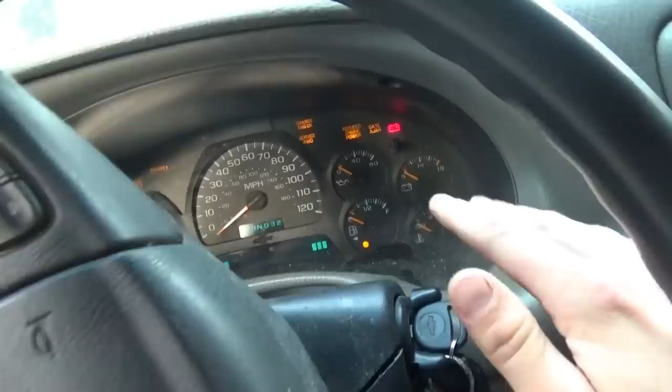Scanned it for codes, no codes. That's why I got the camera out. No codes, no crank. Where would you guys go next? On this system, I think it's a pretty standard starter relay controlled by the PCM. So let's go there and do our simple checks, maybe pull up a wiring diagram.

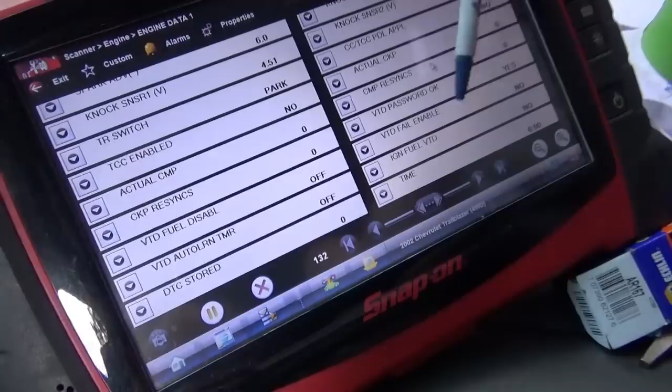By the way, we do have communication with the computer. All the data looks normal as far as I can tell right now. I'm wondering if there is a starter enabled. Fail enable, password okay, yes, everything's good, but the starter just plain does not engage. So again, let's go to the starter relay and do a couple checks there.

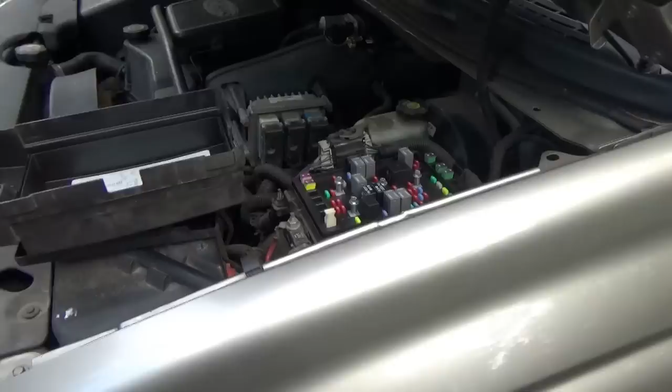Got our fuse box opened up. Mini relay 47 is starter. That's this guy. So we don't even need a wiring diagram, we already have one right here. There's a pin layout, 87, 30, 86, and 85.

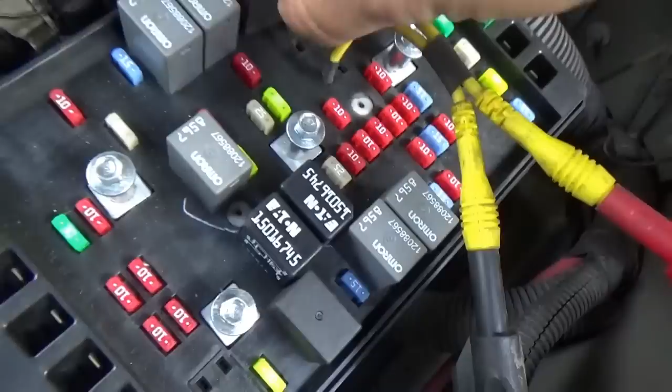Time for scope on a rope. Alright, we got the test light connected across the control side, which is pins 86 and 85. So if you flip the relay around, it's going to be like that. Those two guys. See what happens when we crank it over. Keep watching the test light and crank. Absolutely nothing. Kind of what I expected because the vehicle did die, so something's wrong with the computer control, I think. Let's check the load side, basically jump it and make sure the starter works.

Alright, now we're doing pins 30 and 87 through a fused jumper wire. Let's try it. Sweet, starter works. Control side issue. Now in this case we do need a wiring diagram because I want to know if it's power side switched, if there should be a constant ground, and we'll see what we're missing.

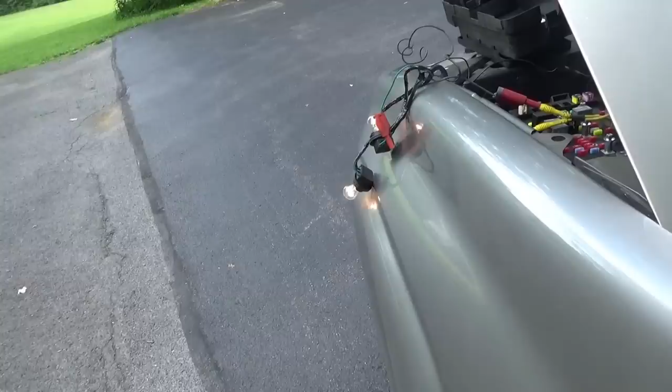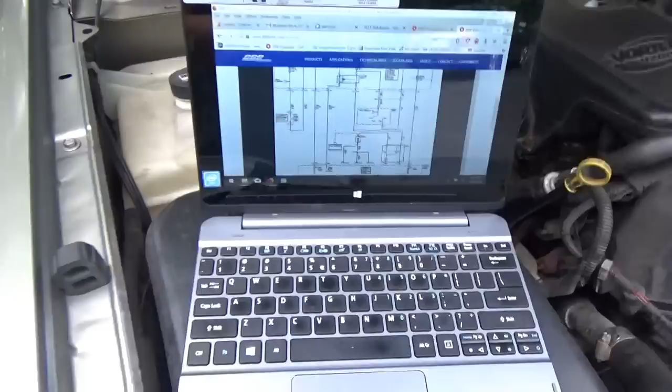Now what I want to do is jump from here, from battery positive, to the other control side. So it must be ground side switched since the other one gave us the power when the key was on, right? Let's try it. Nothing. Alright, so if it is ground side switched, we have no control on the starter relay. In this case, we do need to find a wiring diagram to be 100% certain of the way the circuit's laid out.

Alright, we got a wiring diagram pulled up for the starting circuit. There is our starter relay, and indeed it is fed in the run start position through the park neutral safety switch, so we did have that power, and it's controlled by the PCM on the ground side, and we're missing that. So what does it take to make the PCM ground that wire?

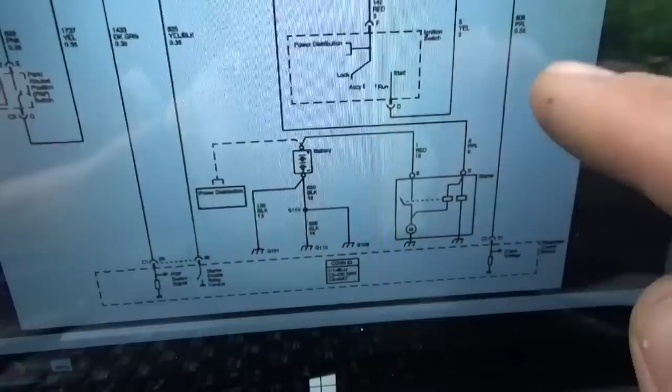Well, from the ignition switch, when you turn it to start, it should send voltage through this crank fuse, fuse 17, right to the PCM. So I think this crank fuse is key. We should check that we have power on that when we're cranking the engine. Simple enough. Alright, fuse 17 right there. It is our crank fuse, and it lives right by the starter relay, this guy right here.

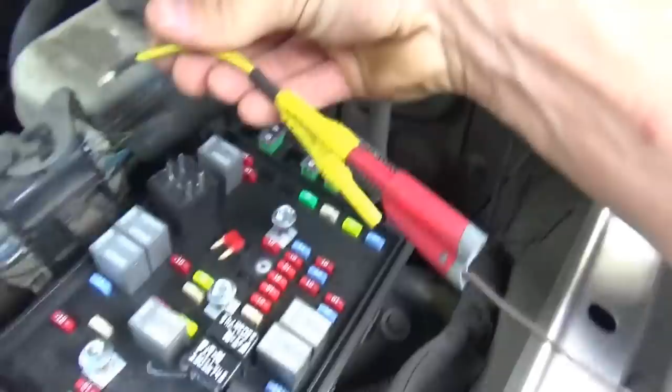So let's pull that out and hook up our test light, and we should have positive voltage on one of these pins. So let's try both of them. That's one. Strike one. And second pin. Strike two. Sweet. I like it.

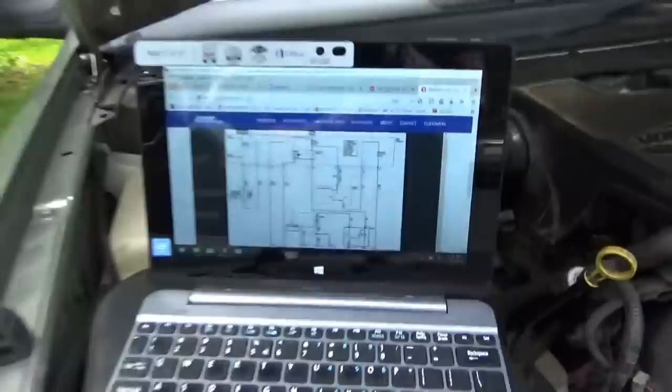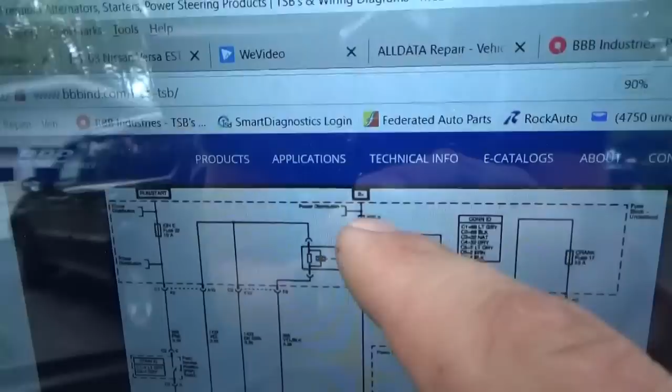So now, if we don't have power on the crank fuse from the ignition switch, where does it come from? Battery positive, ignition A, fuse 34, 40 amp in the same distribution box. Let's go there. And by the way, we know that fuse is good because we jumped the load side of the relay and the starter worked. So where do we go? I think we're gonna go towards this ignition switch.

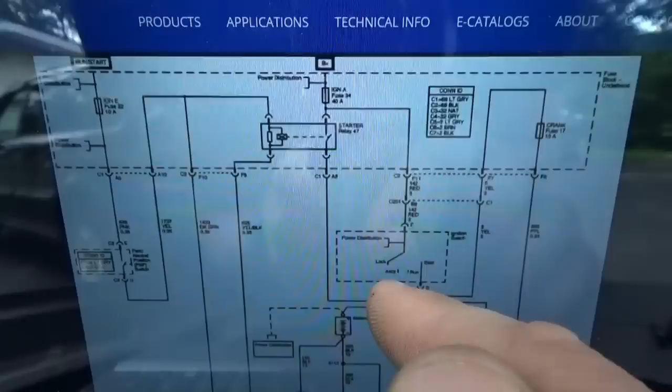So at the ignition switch, we'll pop the cover off, and we should make sure we have power at this red wire. And I would think that would be good there because it works on lock, accessory, and run, but not start. But let's go to this ignition switch, make sure that red wire's hot, and see what's going on with this start circuit.

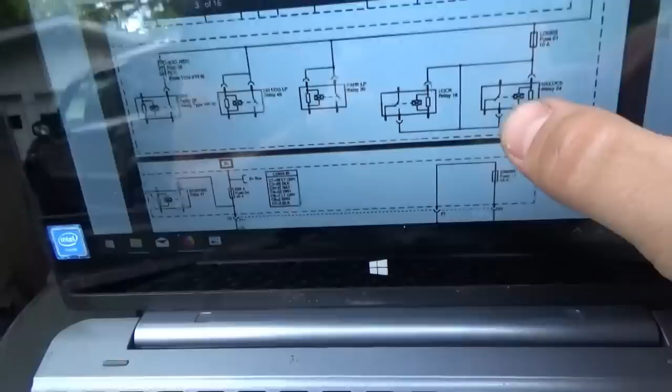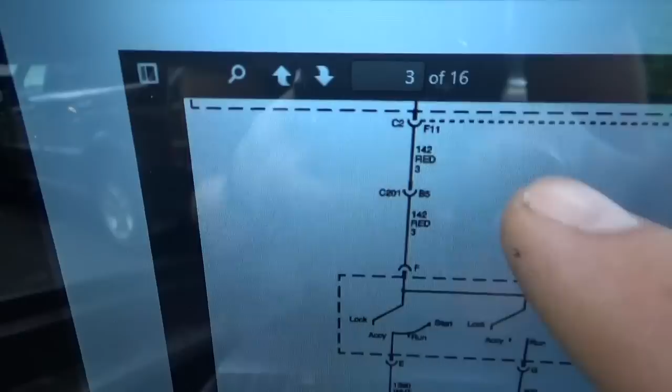Alrighty, so power distribution diagram. We want to see what all comes off of this ignition switch, what feeds it, and where the power goes. Now, let's focus on the start circuit. So the crank fuse is right there, and that's fed on this yellow wire, pin D on the ignition switch. We don't have that at the fuse, so we'll check that. And then it looks like everything here is fed off of the ignition A fuse 34, 40 ampere.

And most of the other stuff in the run accessory position seems to be active. And we have power to our PCM, we have data. So we're mostly worried about the start circuit. And then, keep going here, start and run. This is pin C, pink wire. So that might be a clue there. That feeds basically also a lot of stuff on the PCM.

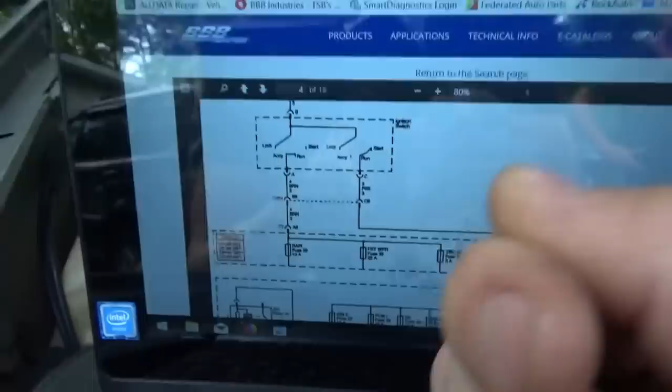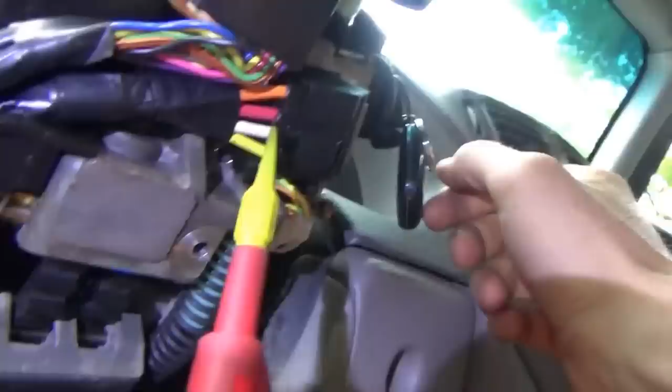Okay. And remember, when we turn to start, the whole dash goes blank, everything goes blank, and we have no starter action. So this pink wire we want to monitor in all key positions, and also this yellow wire on pin D. So let's get to this ignition switch and do some checks. Got the steering column off. Our test light works. This is the red wire. So let's see on the yellow wire if we get a crank signal. 1, 2, 3, nothing there.

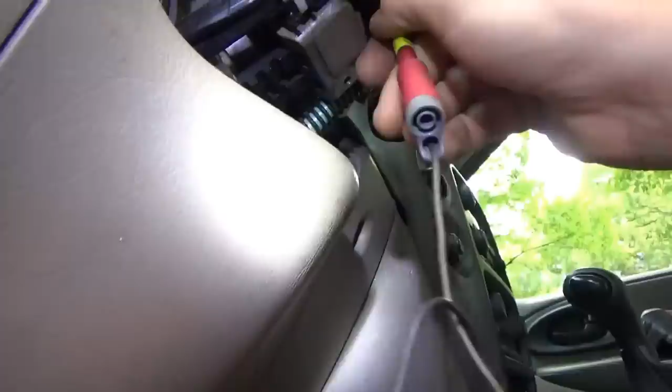That's a problem. And then, what other wires do we have here? We have a red up top. Try to back probe this guy up here. Okay, there you go. Stay in. See what happens to the feed. It stays constant. And finally our pink wire. That's hot right now. That's hot in run. Hot in crank. Interesting. Anything that we're missing here?

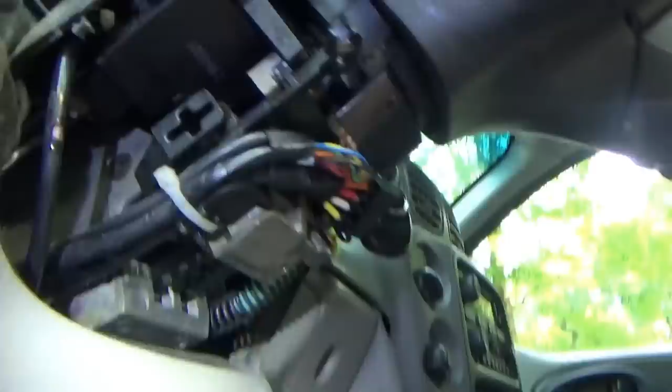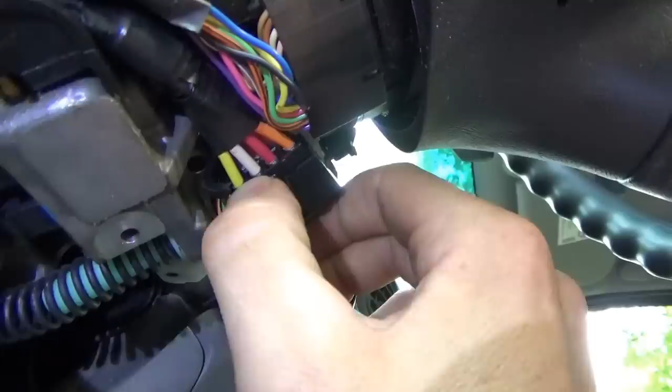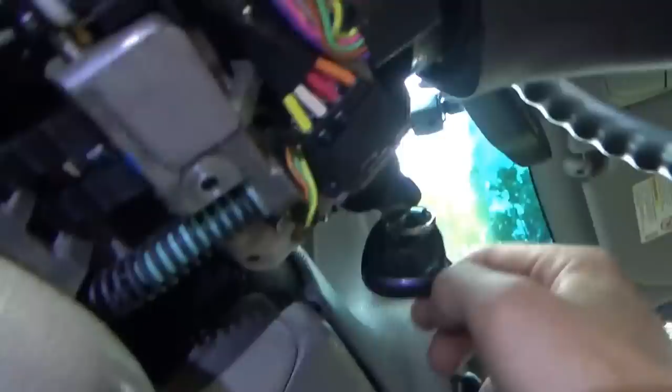So I just want to make sure what we're looking at. So red wire on pin F, and then the yellow wire's on pin D. A, B, C, D, E, F. I assume it's A, B, C, D, and then the pink wire should be E. Let's double check that. Oh, pink wire is, it says C. A, B, C, D, E, F. Okay, so it starts from the top. The pink wire is C, yellow wire is D, red wire is F. I like it.

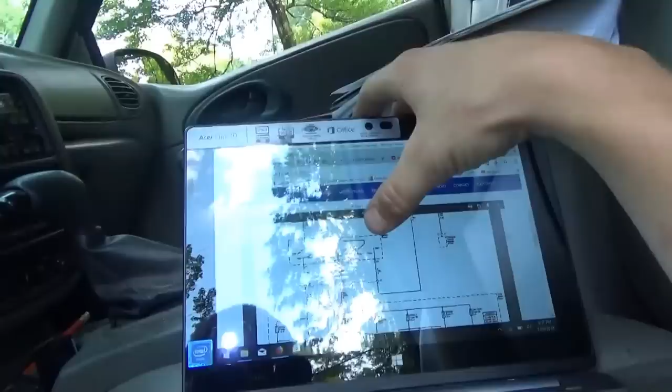So what's our problem? We don't have anything on that guy. So what we're gonna do is kind of be the ignition switch, turn it to on, and then simply connect pin F to pin D through a fused jumper wire, and that would be this red wire to that yellow wire. So let's try that. Let's pop the starter relay back in and pop our crank fuse back in. Should be good. I mean, you already replaced that. And let's get a fused jumper wire.

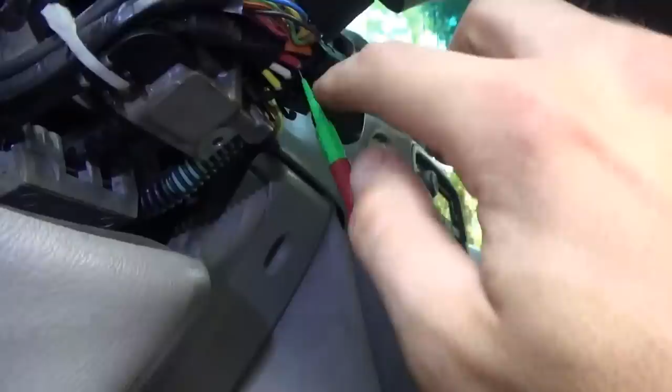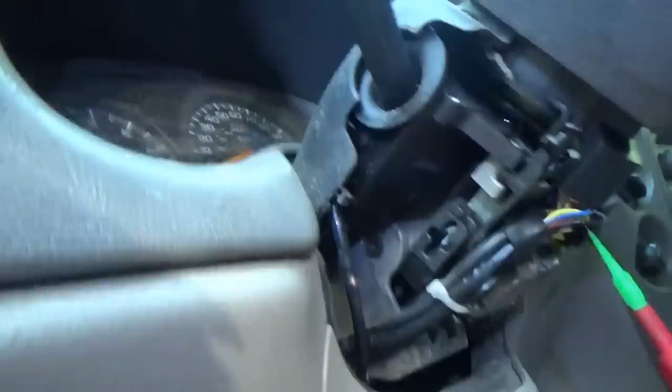Alright, so key's on, dash is lit up. Now we're connecting pin F to pin D, the red wire, pin F to pin D on the start circuit. Here goes nothing. Alrighty, nothing happened. Let's try again. Nothing. Well, that didn't go as planned. What did we forget to do here? Crank fuse is in, relay's in. What are we missing here?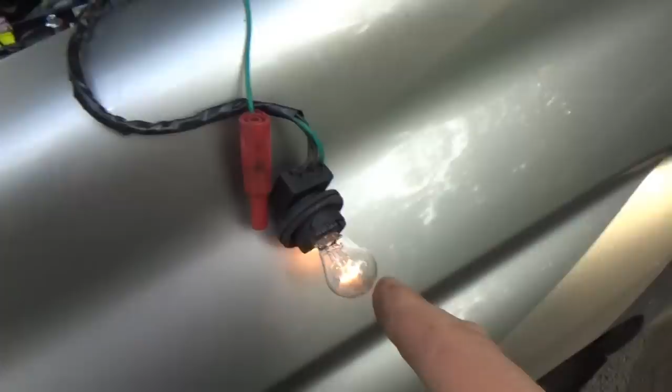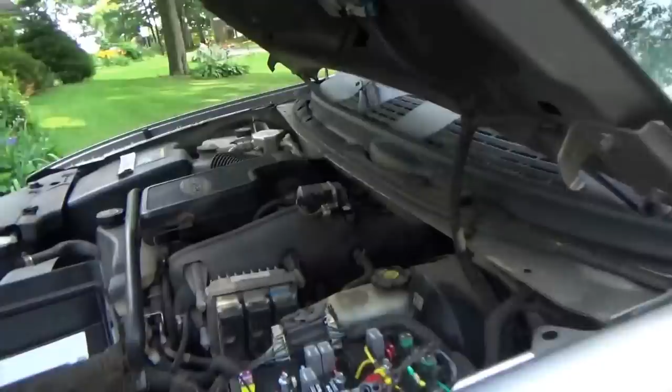Let's put in a test light again. In here, I just want to make sure we're getting signal from the ignition switch to here. Aha, victory. So, see the light is lit when we're jumping red to yellow. Disconnect that guy. No more light. So our yellow wire is good from there to the crank fuse. Cool? Cool. Now we know that that is the feed pin, so that must go through the relay to the PCM.

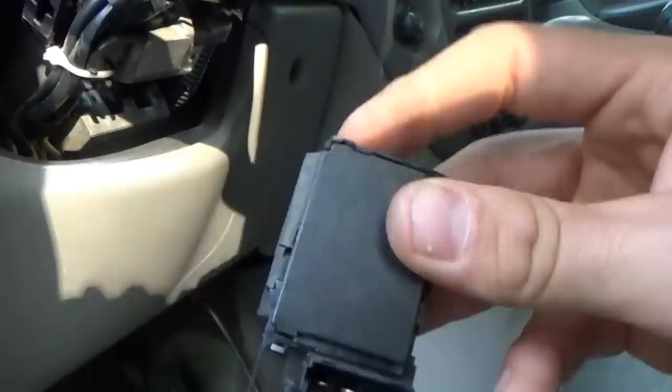So basically, when you turn the ignition switch, two things have to happen. We're feeding the starter on the start circuit through the crank fuse. So right now, the first thing we know is bad is the ignition switch. 100% guaranteed we're not getting a power feed on that yellow wire in the crank position. So basically, this contact right here, no good. New, this is the original one. Now, second problem, the PCM is not grounding that wire when we crank the vehicle. Problem number 2, right?

Why would that be? So this kind of sucks because we could have been done. It is a bad ignition switch, but there's also another problem. Why did the vehicle stop running? All the other wires that need to be hot in crank and run are there. So basically, what we can try to do is turn the key to on, manually jump the starter, see if it runs, and that'll at least tell us that the computer is operational. Then we'll figure out why the control side's messed up.

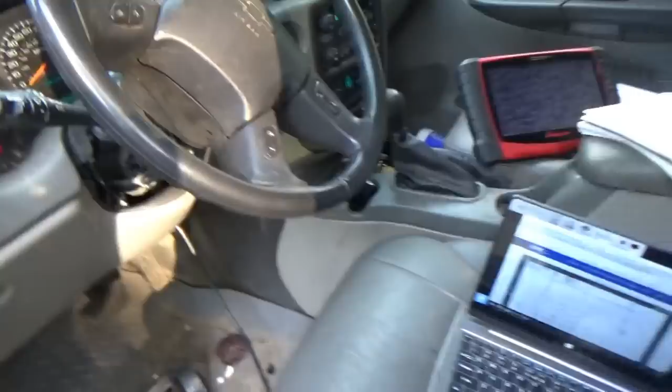Here we go. Key is on, ready to go. Manual bypass test on the starter. Connect these two guys through a fuse jumper. Does not run. Also expected because the thing stalled out for no reason. So now we're going towards the PCM, powers and grounds. Right? This PCM has no control of the starter relay, even though it communicates and gives you data and stuff. So pretty interesting, huh?

Alright, so we're not going to mess around with this stupid thing. I took it out, the new one, put the old one back in. We're back on the yellow wire. Here's what should happen in the crank position. Ready? Boom. Nice. Right? On, crank, nothing. But the light lights up, so this switch is good. Put this fuse back in. Put this relay back in. Obviously it's not going to start. The PCM is not grounding it, but at least we have a good feed to it now. Right? Good.

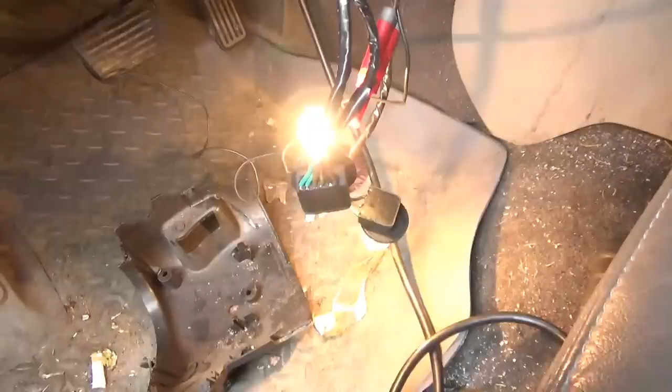Now, here's my question. How does the PCM know when to ground the starter relay? Is that like, you turn it to on, it says starter enabled, it grounds the pin, and then when you turn it to crank, you provide the power, circuit completes, starter engages. So that pin should be grounded whenever the computer is happy to go ahead and start this truck.

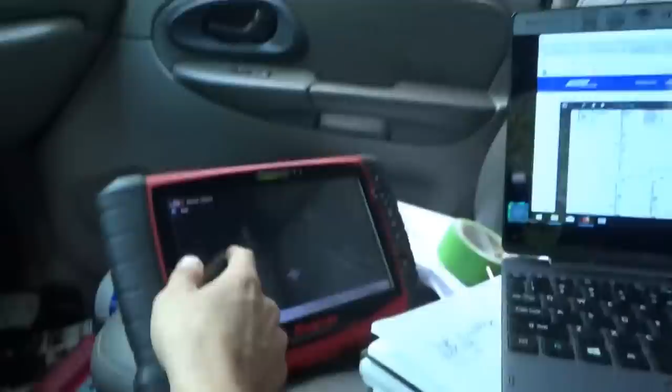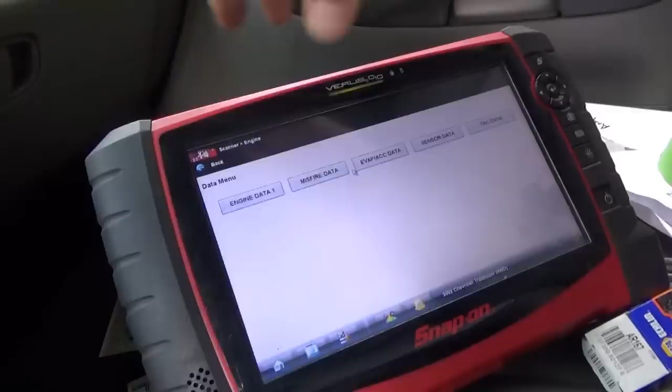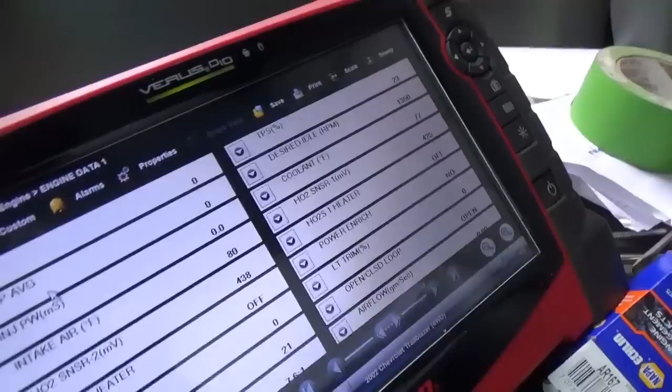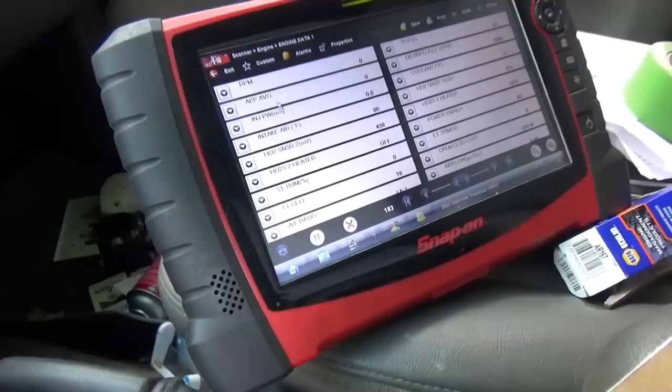So let's go back to our scanner for a little bit and go to data, and see what happens when we turn it to crank. Our data is still updating. Turn it to off, or run, still good. Turn it to accessory, and now it's not updating. Actually, it still is. Take the key out. So the PCM is still alive. Might be a GM thing.

So, just a second. Where's my pen? All right.

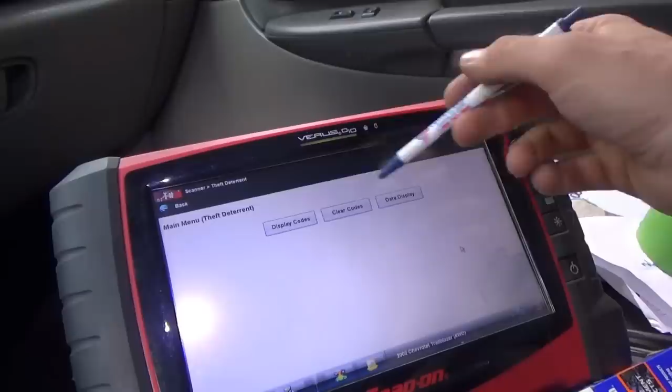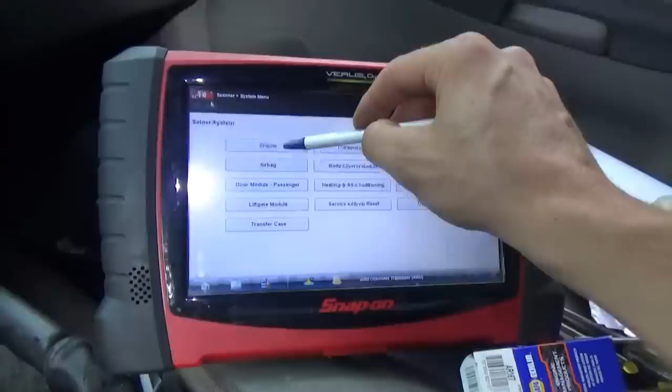Turn the key on. We see a security light, and it goes out. Good deal, right? In the theft deterrent menu, I can't for the life of me communicate with this thing, so I'm not sure if it has a separate module for this or if it's controlled through the BCM or not. According to the wiring diagram, well, anything could be tied into the PCM. So if the PCM is not grounding it and not letting the car run, that could be a problem. But you would at least expect some kind of code in the PCM, right? And right now we have no codes present. So that's that.

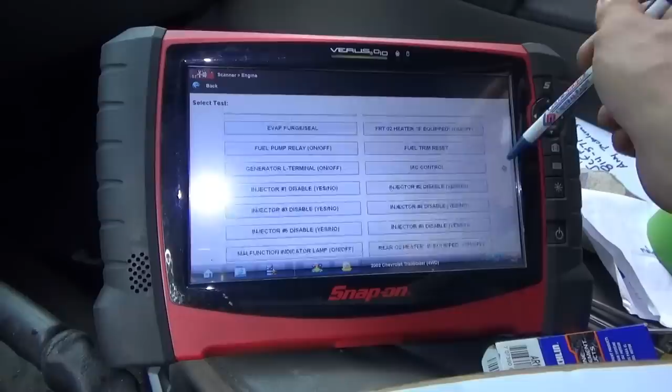Where do we want to go here? Functional test. Let's see if we can just command some stuff on and off. Vent solenoid, purge solenoid, air pump. Nope. I want to hear something click. Fuel pump relay. Here we go. On. Off. On. Off. Nothing. Very interesting.

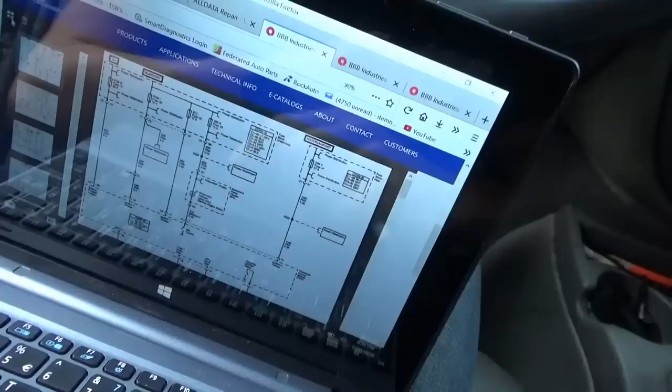Okay. So, what does it take to make this computer activate stuff? Do we have a power or ground issue on this computer? Even though it's talking, it has more than one power and ground, right? So my thought is go back to our engine control diagram and just look at these powers and grounds. Let's zoom in on this guy a little bit. Oh, come on, stop it.

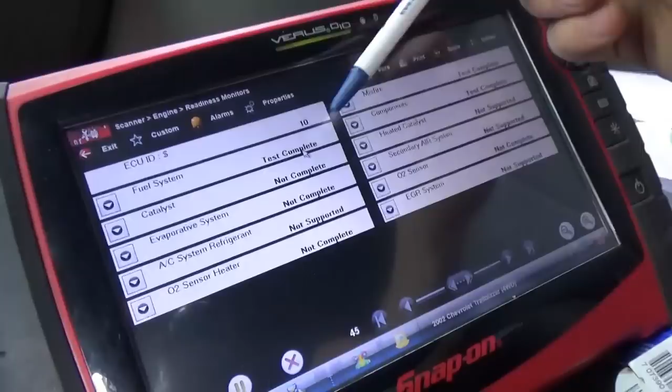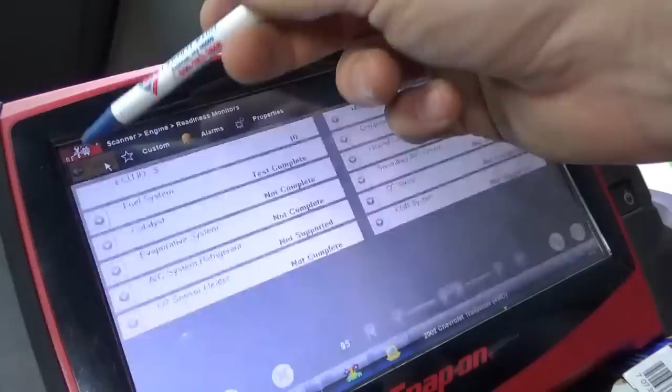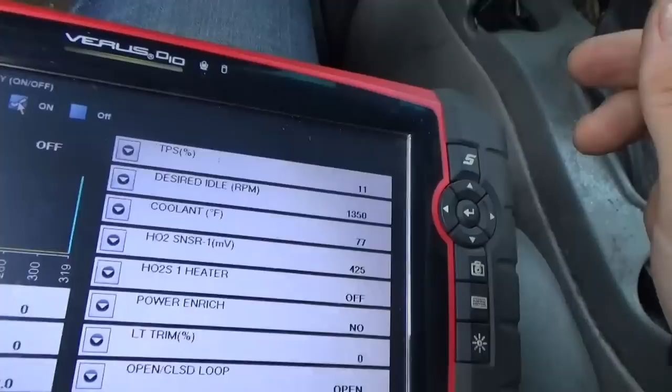Just for kicks, I went into OBD2 to see which tests in the emission system were complete. Obviously, this truck has been messed with already, but we do have some complete tests, so the computer seems to be alive. Now here's something else weird. I can't do a bidirectional test on the fuel pump relay. It just says off. I don't hear it run. Got nothing. If you press the gas pedal, throttle position sensor seems to respond just fine. Man, this is not as straightforward as I thought it would be.

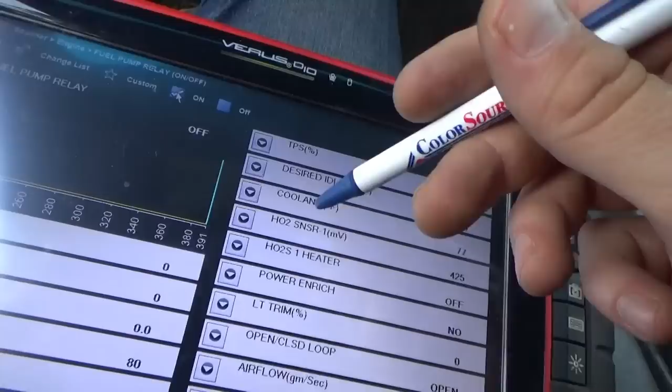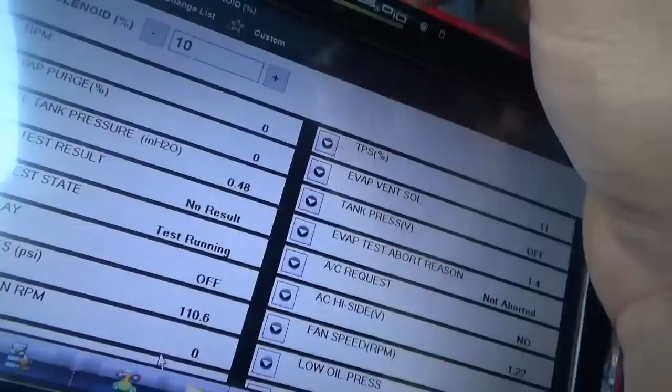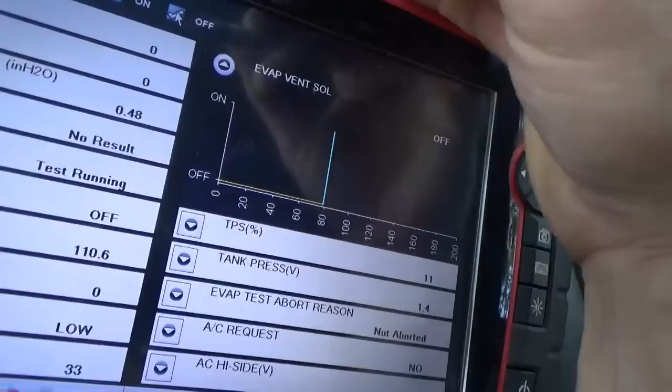Why do we have no bidirectional controls of anything? Let's try purge solenoid. How about that? I want to see if anything on this computer works. Test. Purge percent. That doesn't work. Vent solenoid. Where's the vent solenoid? There you go, vent solenoid on or off? On, off. No clicky. No bidirectional control. What the heck? Oh.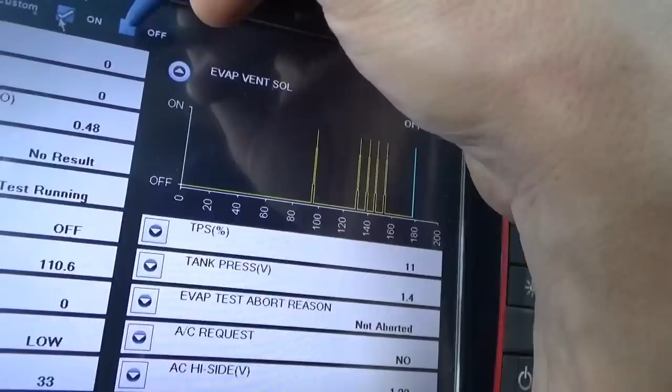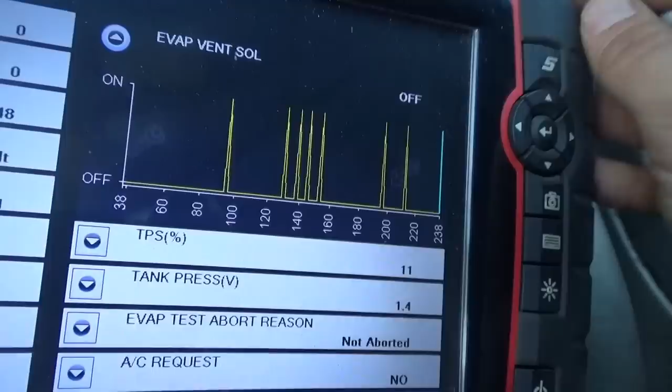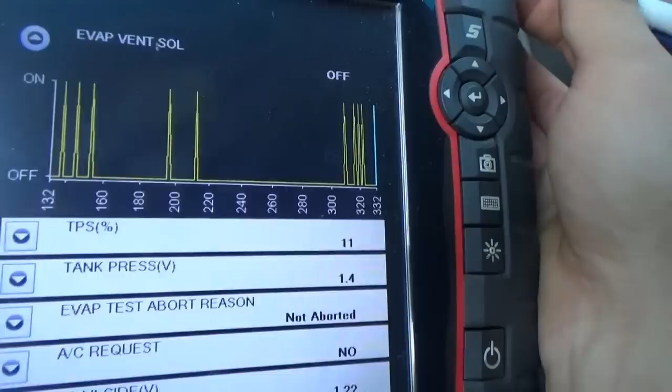Okay, I hear it clicking. So it did 4 clicks, I guess. Off, on. What kind of bidirectional control is this? Off, on. Come on. Click. This is crazy. It did click. It didn't click there.

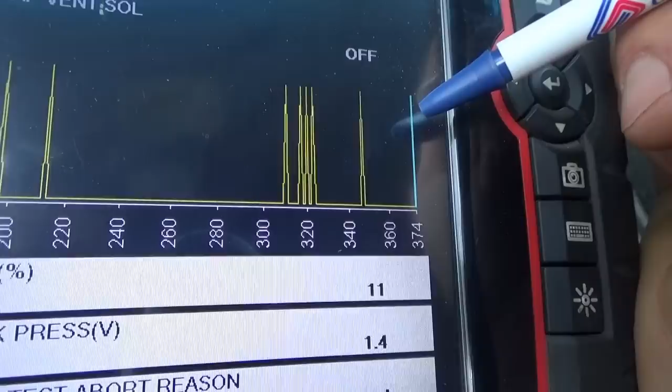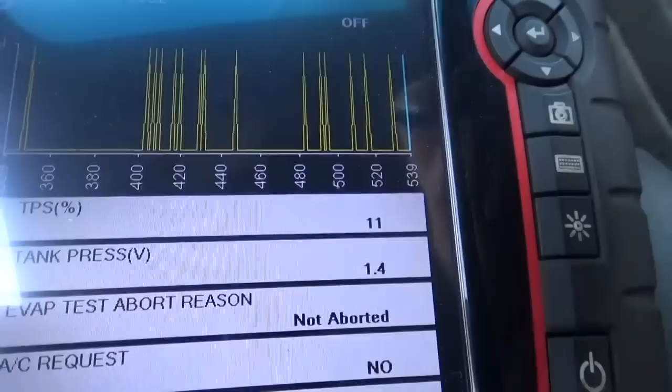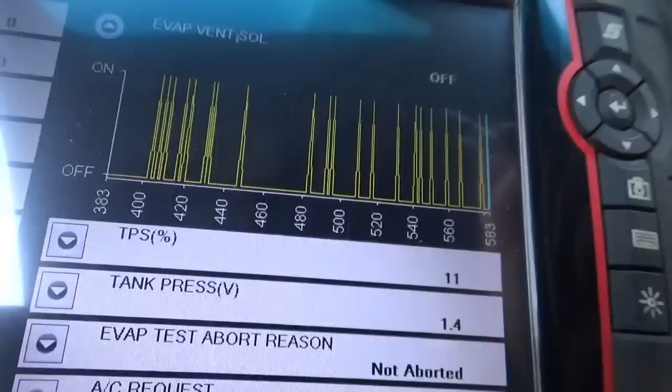Something is messed up with the computer, isn't it? Is it trying? It clicked those 2 times, not those 3 times. Isn't it supposed to be just on or off? This is nuts. Are we dealing with a bad ground? Why the heck would the vent solenoid do this? Yeah, I've never seen a bidirectional control do something random like this. And it knows when it's on or off. Off. You would think it would throw some kind of code for this. I mean, that's not normal.

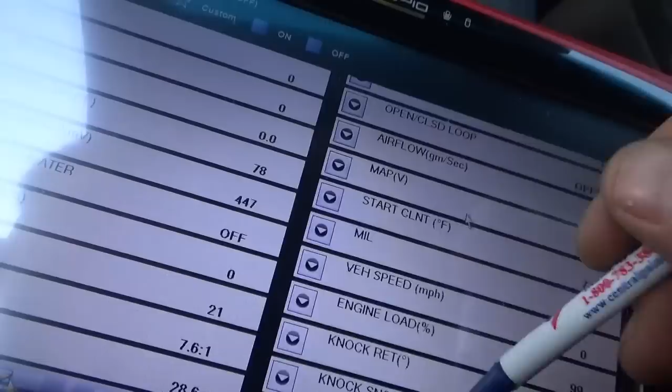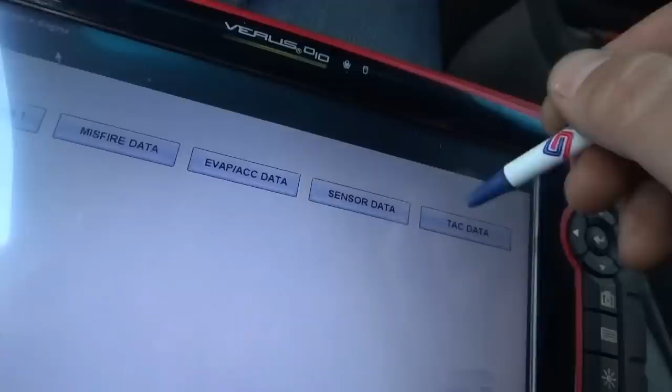Let me see, AC relay. Can't turn the fuel pump relay on. Let's see. Where's our AC relay PID? I guess we could change our list to evap accessory data. AC relay on or off. Let's see, on. Cannot be commanded on with engine running or dash control off. Interesting. Okay. But the fuel pump, it has to be able to command that on.

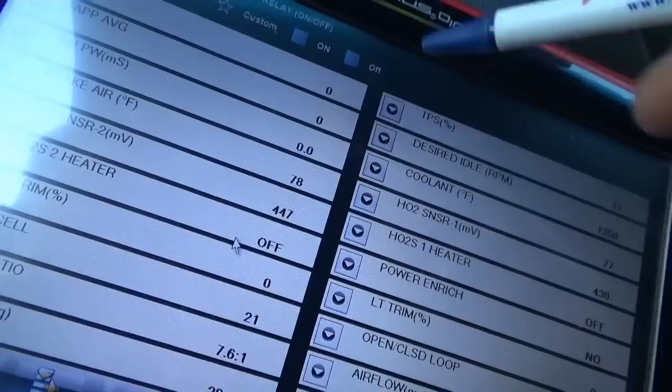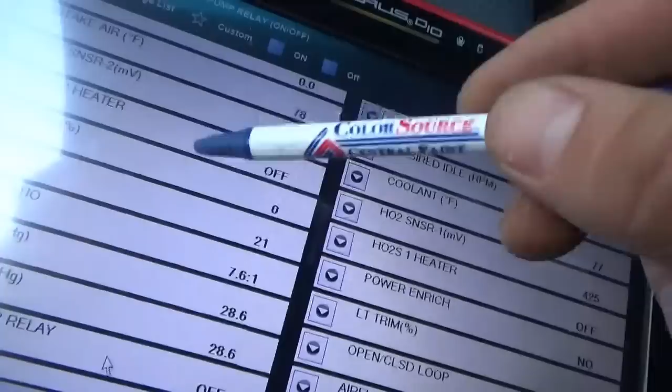I really hope it's a bad ground. We already found one problem. The new ignition switch is faulty for sure, 100%. But now we're actually going after the real problem. So fuel pump we can't command on, it looks like. Starter we can't engage. Now the vent solenoid only draws 1/2 amp. I mean, if that's having a hard time doing its thing, for sure, it might be a bad ground at the computer.

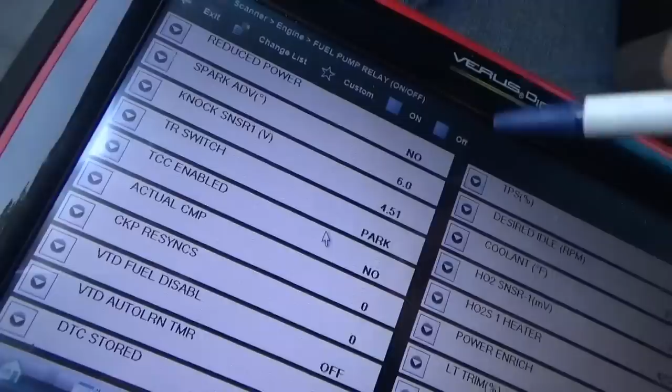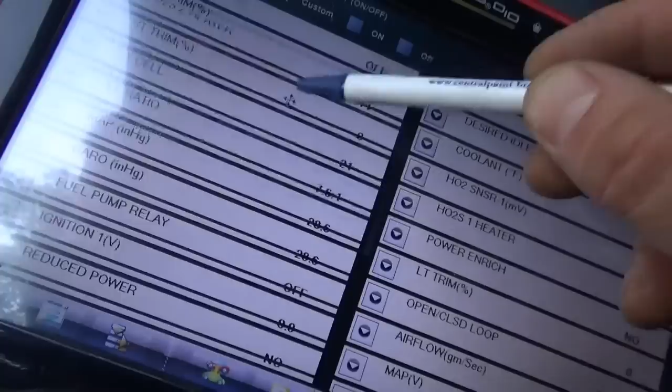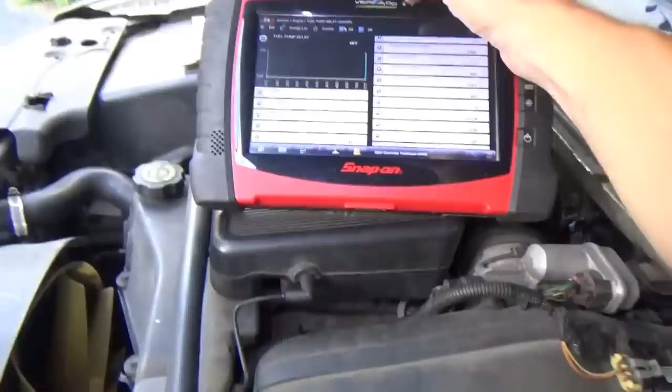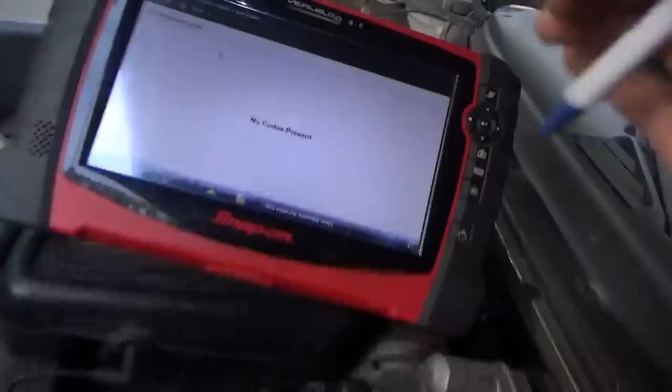Where's our fuel solenoid? Fuel relay, fuel pump relay on. Just gonna let it run for a little bit, see what happens. Do a little key tap test here. No control for the fuel pump. Okay. How can this not throw a code? I don't know. Codes menu. No codes present. You see it, you believe it. Let's take a look at that wiring diagram. Look for grounds.